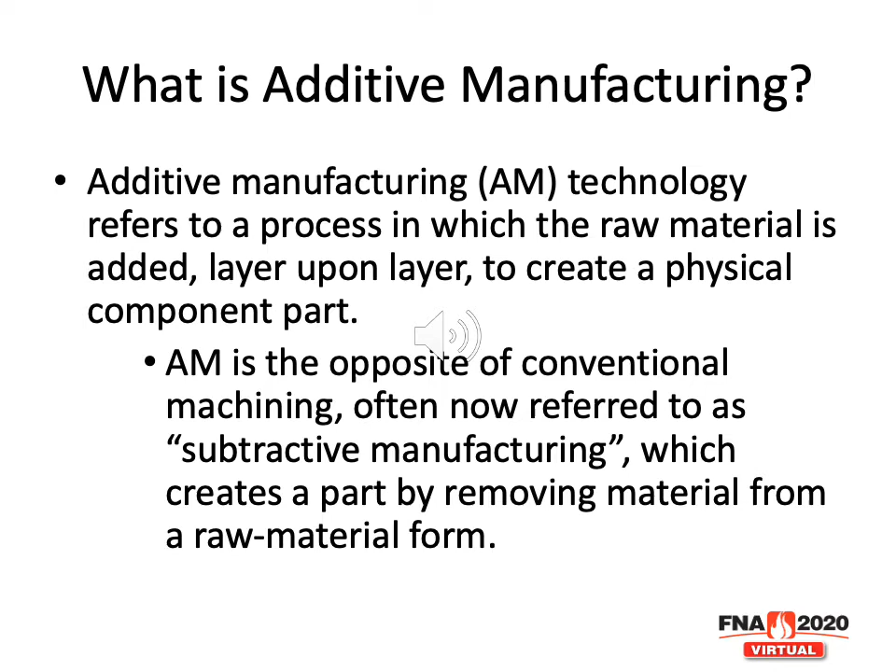The key question we must ask ourselves as an industry is, are we on the cusp of another industrial revolution? Namely, the decentralization of manufacturing. This is what the additive manufacturing technology world would have us believe. The decentralization of manufacturing perhaps began with the creation of manufacturing cells, or dividing the manufacturing process up into discrete segments.

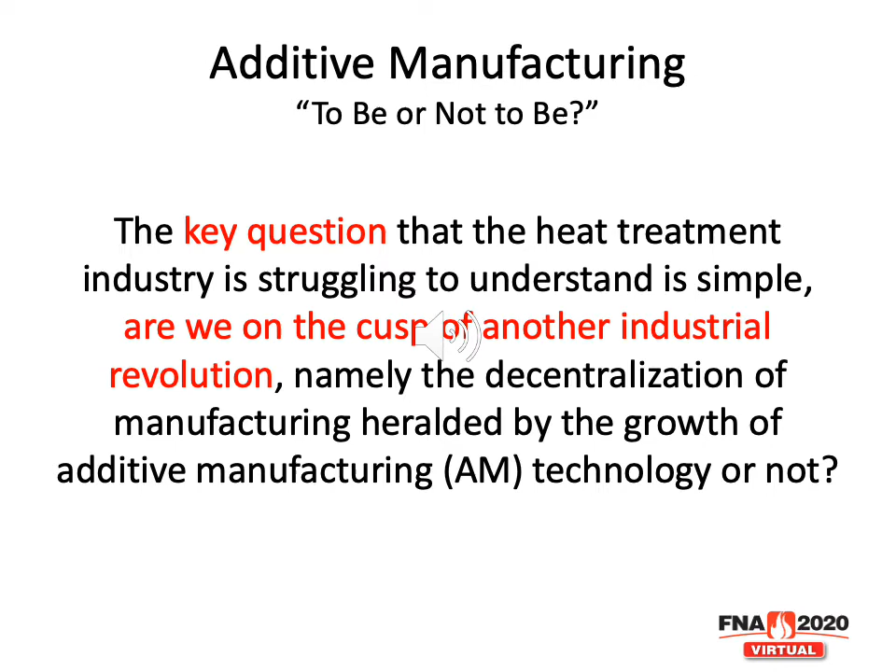Part of this attempt at decentralization was the integration of heat treating into the manufacturing cell. But additive manufacturing technology offers an opportunity to go far beyond this by creating a discrete workplace in which a component part is manufactured and heat treated. Thus, it represents a threat to the heat treat industry.

The answer to the question, are we on the cusp of another industrial revolution, appears to lie somewhere in between the total adaptation of additive manufacturing technology or the restriction of this technology to niche industries. If the technology falls short or appeals to only those niche industries, perhaps as much as 10% of the conventional machining industry will be affected. If, on the other hand, the technology is wildly successful, it will be seen as a replacement for a significant number of component parts, perhaps as many as 40%.

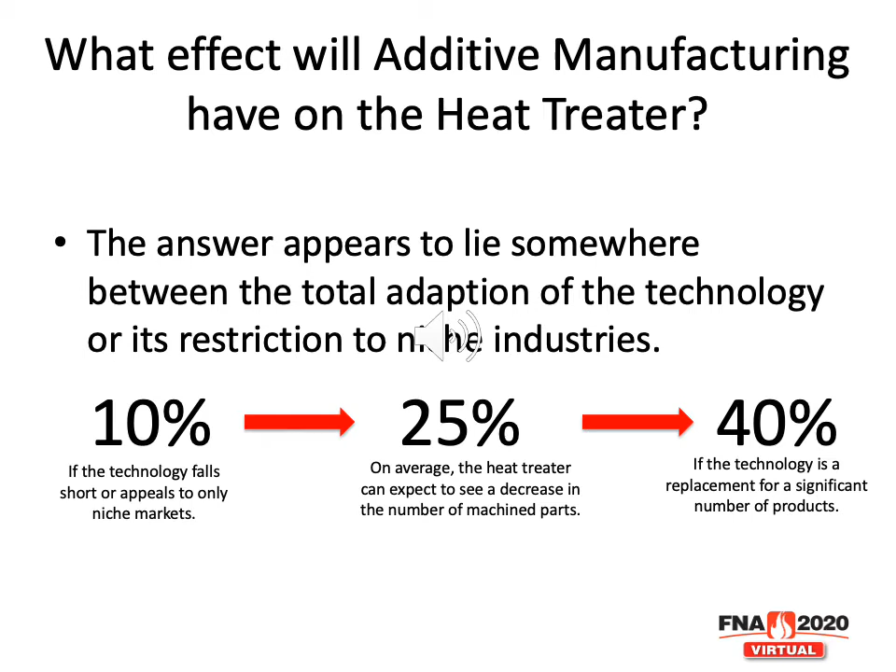So, the real answer is that the heat treater can expect to see a decrease in the number of machined parts that he's processing. Ultimately, perhaps as much as a quarter of the industry will be affected by this new technology. You may be asking yourself, as I do, what is the market for an additive manufactured part? Who's going to buy parts made from this technology?

Well, the consumer electronics industry, automotive and motor vehicle industry, medical and dental, aerospace, industrial machinery, academia, the government and military, and a little bit of agricultural and the architectural industry will benefit from additive manufacturing technology.

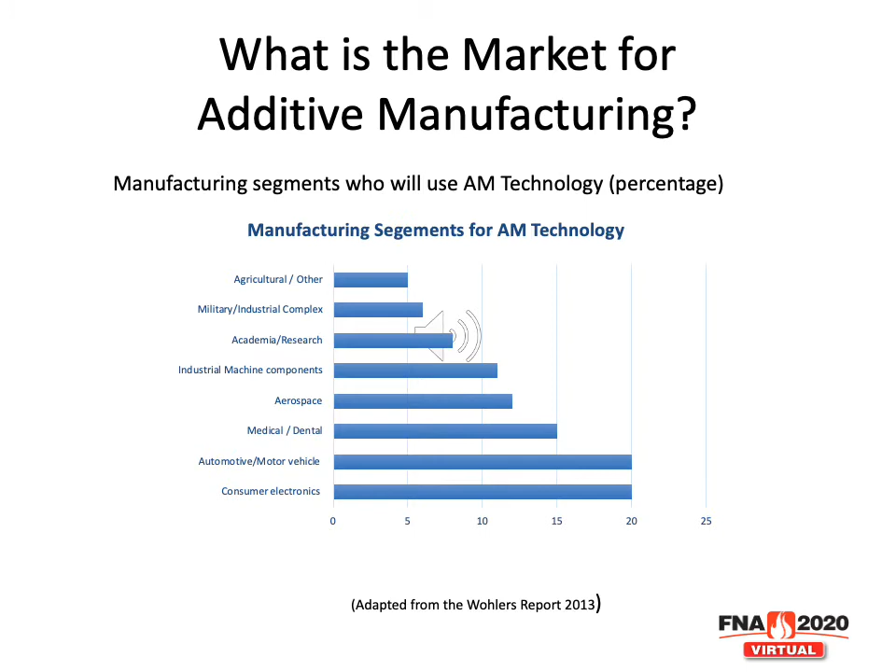Of the half dozen or so additive manufacturing technologies which are available to produce component parts, only a few of them involve thermal processing, heat treating, or sintering processes. These include metal laser sintering, also known as selective laser melting, powder bed fusion, or extrusion-based metal technology being examples, jet prototyping or material jetting, an example being literally the printing of a 3D part using metal as opposed to, say, component plastic, and layered powder metallurgy, a new and emerging technology.

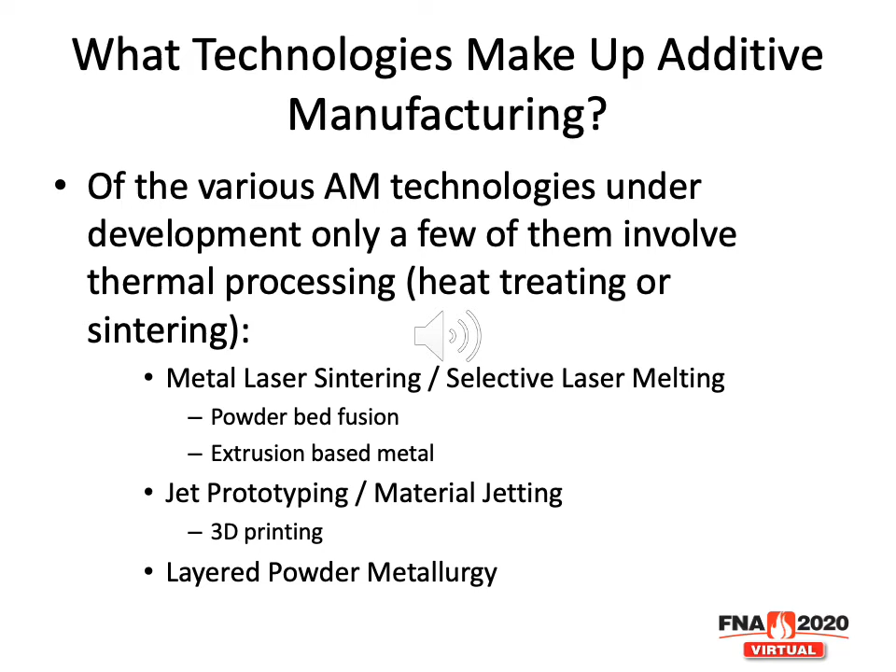At this point, you may be asking yourself, what heat treatment processes are used in the additive manufacturing world? Well, for laser sintering or selective laser melting technology, we find that heat treatments such as stress relief, solution annealing, or aging are used to enhance mechanical properties such as tensile strength and hardness, and also improve wear characteristics. And these heat treatments are typically carried out either in an argon atmosphere furnace or in a vacuum furnace.

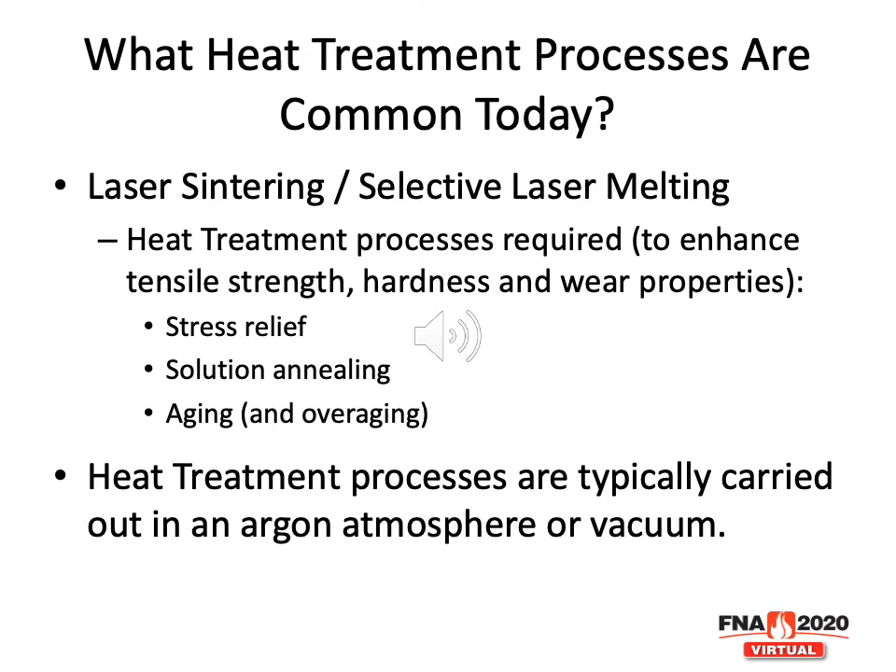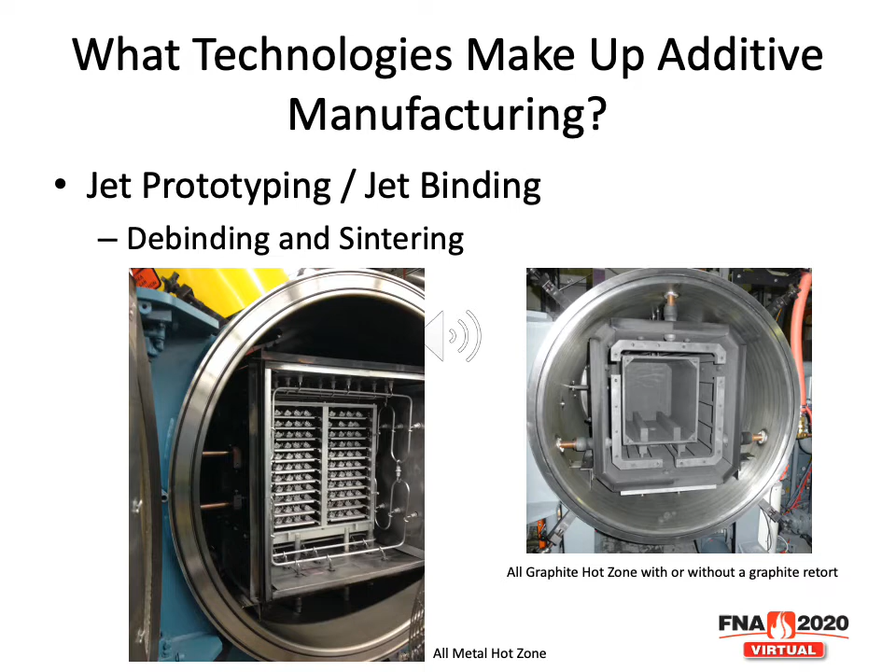By contrast, jet prototyping or jet binding requires the material to be debound and sintered. These processes are not often done in a commercial heat treatment shop, although they certainly can be. So, where does this leave the heat treater? Well, it really depends on which type of additive manufacturing technology is being used and how popular that technology will be in various industries. Let's take, for example, laser sintering or selective laser melting.

It seems as if the aerospace industry and the medical industry are particularly interested in this technology, which will require the customer to either purchase their own heat treat equipment, which is possible but perhaps unlikely, or outsource. So as a result, this offers a unique opportunity for the commercial heat treater to take advantage of these types of component parts. Of course, if you're planning to do so, your shop needs to be NADCAP accredited and, as quickly as possible, develop skill in dealing with the aerospace and medical markets.

By contrast, jet binding technology will focus on selling customers a complete, self-contained manufacturing cell consisting of software, 3D printers, the binding technology, sintering technology, and the post-process tooling for quality checks. This creates a bit of a dilemma, but also an opportunity for heat treaters. In particular, should we become parts producers? Should we purchase this technology, set up manufacturing cells, and produce parts for our customers?

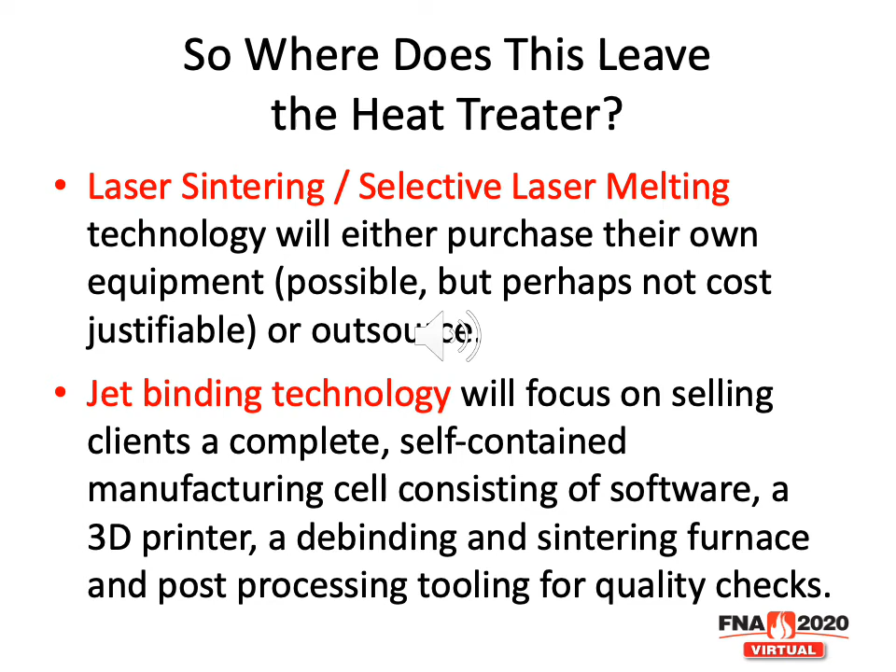The technology goes from the design phase to the component manufacturing phase almost seamlessly. But this means we have to invest and understand the binding technology and sintering, which we are very capable of as an industry in doing. There are many technological advantages of additive manufacturing. And while I won't read this list per se, I think it's important for the listener to understand some of the advantages over, let's say, conventional machining.

First of all, one of the niches is certainly small runs of complex parts. They can be produced quickly and at low cost. Also, the parts can be lighter weight than traditionally thought of. Honeycomb designs are possible, reducing weight while maintaining or even increasing strength requirements. Another advantage of additive manufacturing is the ability to make changes on the fly, something that is not common in conventional machining. And highly complex parts can easily be produced. Finally, additive manufacturing generates little or no waste, which is also highly beneficial to the manufacturer.

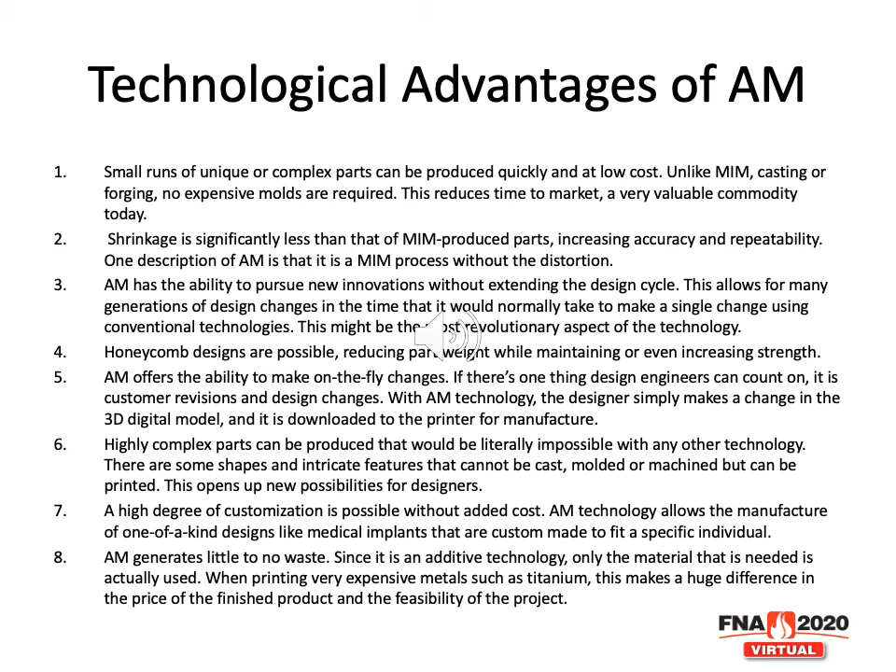As we come to an end of this discussion about additive manufacturing technology and its impact on the commercial heat treat industry, I couldn't help thinking of a quote by Franklin Roosevelt back during his first inauguration, just in the middle of, or at the end of, the Great Depression. As he said, "So first of all, let me assert my firm belief that the only thing we have to fear is fear itself. Nameless, unreasoning, unjustified terror which paralyzes." A rather ironic quote coming from a polio victim.

However, these words might summarize the feelings of many commercial heat treaters. Do we have something to fear about additive manufacturing technology? My answer is a definitive no. It's another technology that we need to embrace. We need to understand it, and we need to understand the needs of our customers so we can service them. Commercial heat treaters are a resilient lot. We can adapt to anything. And the move toward additive manufacturing, while exciting, while unknown as to its total impact, is something that the heat treat industry need not fear.